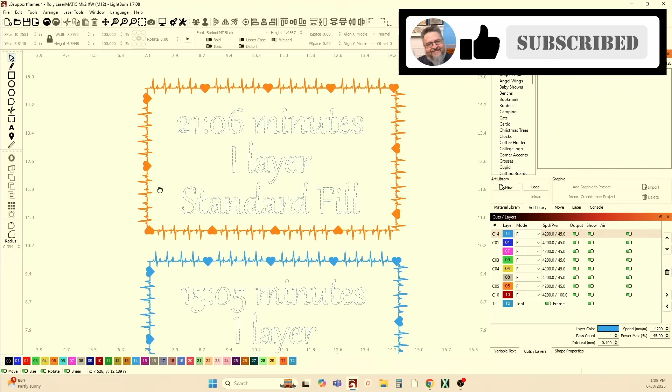Here I've got it on a layer, single layer in a standard fill, and we look at the estimated time here, showing 21 minutes and 6 seconds. Now, you can see I've got the traversal moves turned on, so you can see the red is showing you all of the movement that the gantry is making with the laser. So anywhere you see red with no black is wasted space, wasted energy, wasted time, because the laser's just moving and not doing anything. It was showing 21 minutes and 6 seconds.

So he went with flood fill. Golly, I labeled that wrong, and I labeled that wrong when I sent it to Lightburn, because I've actually sent this to Lightburn asking for some feedback and some advice on how Lightburn's reasoning works, how does it rationale, what to do when it does what it does. And I labeled that as offset fill, and it's flood fill. See, I screw up all the time. So let me fix that real quick, so people don't come in the middle of it and say, wait a minute, that's not offset fill, it's flood fill. So this is flood fill.

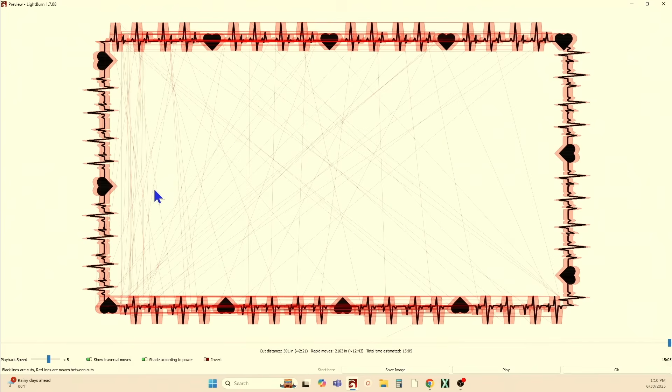So flood fill goes from 21 minutes, you see, to 15 minutes. So he saved 6 minutes on this engrave time, but you can see all of the rapid movements or jumping around and jockeying back and forth that the laser's doing. In fact, let's scroll this back and let you see it here. This is flood fill.

Flood fill, that's what I would expect flood fill to do. Just kind of come up and do all of that axis and then do all of that, but it doesn't. It engraves a little bit there, and then it jumps down to the bottom, and it jumps over it there, and then does all that axis. That's good. And then it starts jumping around, jumping around, jumping around, jumping around.

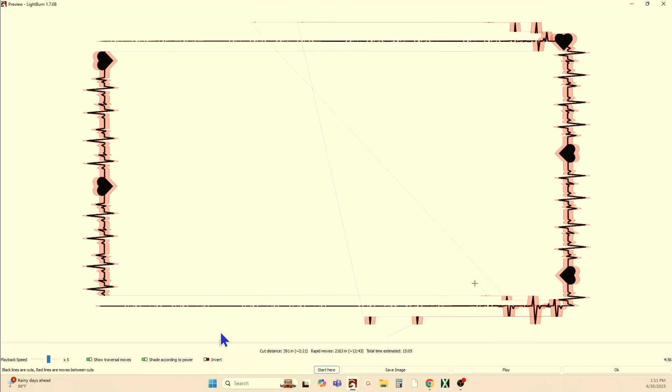And I don't understand that. It doesn't do it based on the origin, it doesn't do it on closest engraving. I don't understand why it does that. But regardless, it still saved 6 minutes doing that. But I'm like, okay, that's still all those movements from back and forth and around everywhere, and I'm cutting down on my cut time here.

That's wasted time. So I said, gotta be a better way. Let me show you the way I think flood fill should work, not offset fill. There, that's better. That's a faster cut time.

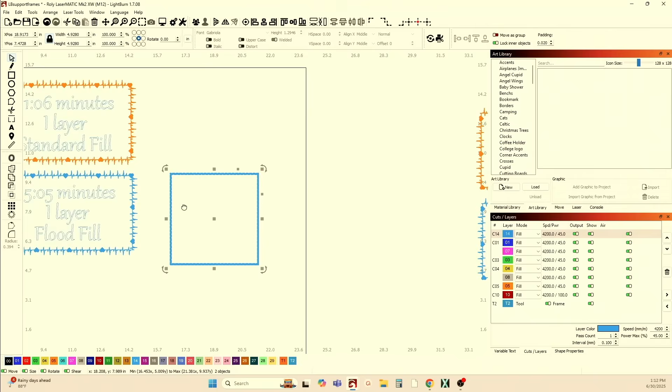So here is... oh, I didn't mean to do that. I wanted to grab the whole thing. Here's just a square that I've got on the same layer as the flood fill.

And when we look at this, you see there's no jumping around. This is the way I would anticipate flood fill to work. It's going to do everything. This is the most efficient movement of the laser. It does that entire axis until it gets to the very end.

Now it starts crawling up one of the side pieces. It'll do all of that. And once it reaches the top, where that top one starts, it'll start going all the way across the top. Now it does all that top until it's done, and then jumps over and does the other side. Now that completes the entire flood fill with no wasted movement across the interior of the frame.

And that's how I would anticipate flood fill should work, but it doesn't. Whenever you've got some designs going on, it's causing the laser to jump around, especially on the x-axis. It doesn't do it so much on the y, but anything on the x, it gets discombobulated and does all kinds of crazy stuff, all the while still saving you time.

Okay, while I'm recording this, I've been going back and forth with Lightburn's support, trying to get a better understanding about why this does what it does when it does what it does.

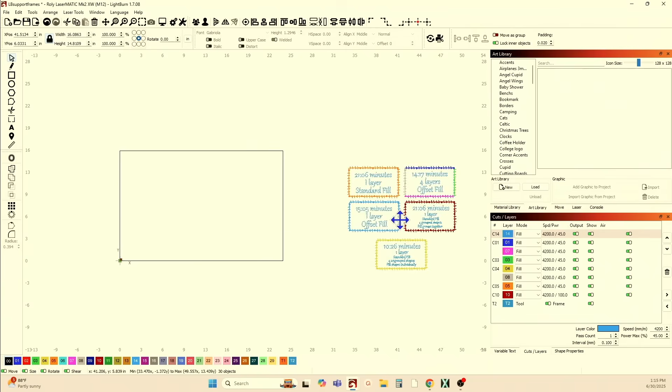So let's grab all of this, and we're going to get rid of that for a second, and we're going to grab all of this and bring it in over here. And what you can see here is I have configured this frame in 5 different configurations. Here's the standard one we just looked at. Here is the standard with a flood fill.

I should have fixed that. I got that wrong in both places there, so let me fix that. Flood fill.

Flood fill. Okay. There, that's standard, that's standard. Okay, now. Very good.

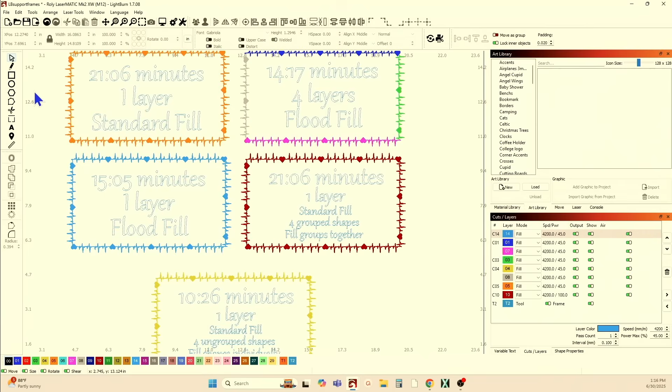So 21 minutes, 15 minutes. I got it down to 14 minutes. That one went back up to 21, so essentially that's the same as the original. But then I got it down to 10 minutes and 21 or 26 seconds. So I've cut the engrave time in half, from 21 minutes to 10 minutes.

Now we're talking about some serious time saving. If you were engraving 6 of these in a day, you've just saved an hour, right? And that's just on the frame.

So how did I do this, and what's the difference, and how did I come about it? Well, I come about it by just testing and testing and testing some more. And you cannot test enough when it comes to your laser designs and work. The more you test, the more you're going to begin to understand how the program works, how your lasers work. So don't be afraid to try new things. Undo is always your best friend.

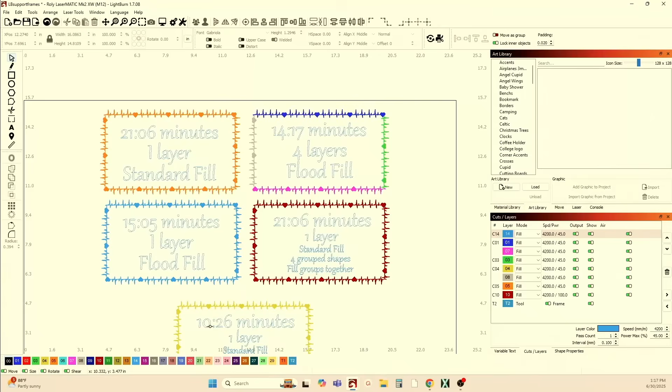So what I did initially to cut it from 15 to 14 is I took the laser and took the frame and cut it up into 4 quadrants, each on its own axis, north, south, east, and west, and put all those on their own separate layer. They all have the exact same speed and power settings, so that doesn't deviate any.

That one's different power, but it's the same speed, 4200. So I'm keeping everything as equivalent as possible. Here I'm still using the flood fill, but 4 layers.

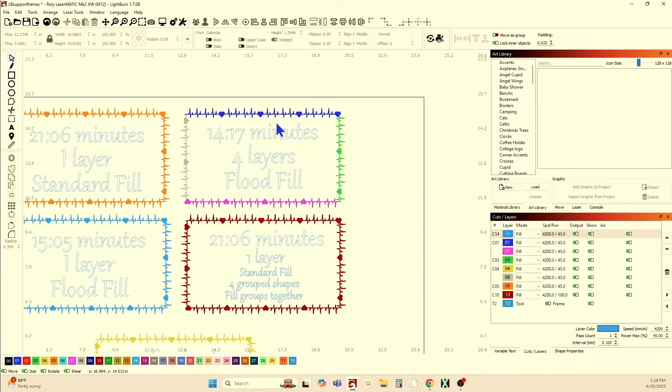So let's look at this one down here again. Look at the preview. You see you got a lot of extra traversal moves across there. Here, if we take this one and look at it in preview...

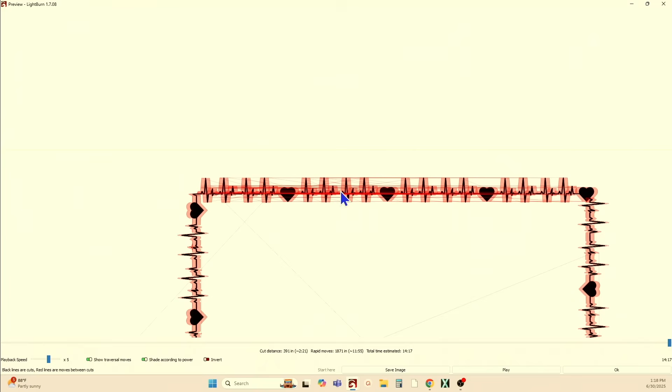you don't have all the extra traversal moves across the middle of the body, but there's still a lot of unnecessary movement up here on the actual x-axis and down here as well. You don't see it on the y. The y gives you exactly what you expect, but on the x-axis in flood fill, it jumps around all over the place. So if we roll this back, there you can see what I'm talking about.

It's going to begin to fill, and it just starts jumping around on the x-axis in flood fill. And those are the pieces of the puzzle I was talking about that are going to need to line up every single time that laser jumps around.

We've saved some more time, saved another minute from 15 to 14. But when I looked at this, this is the same 4 individual pieces, but I put them all on the same layer. So this is a standard fill, 4 grouped shapes, fill groups together is the option I have in the fill setting, and I'll show you that.

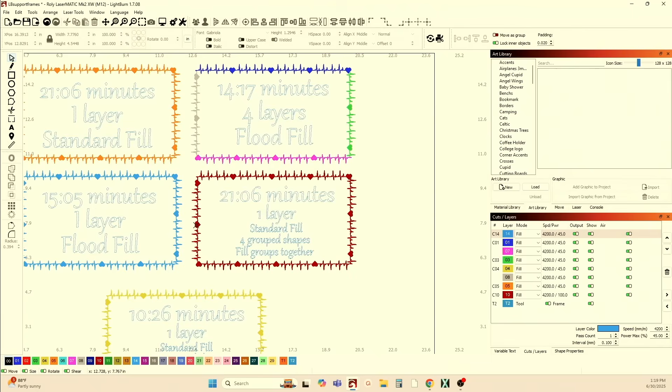But when I did that, if I look over here and click on this one, let's see, it's grouped. And if I go to preview, 2105, changed a second, but it's the same as up here. All right, I've got all that wasted energy and wasted time.

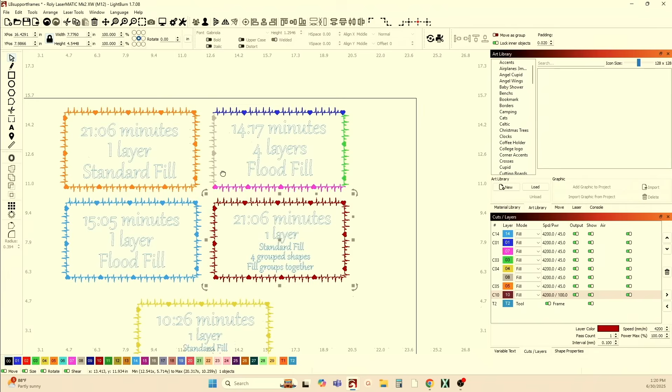This one is the same thing again. So these are all the same configuration. This is west, east, north, and south. And if I come down here, I've got the same thing. There's west, there's east, there's north, and there's south. So this one is exactly the same as this up here.

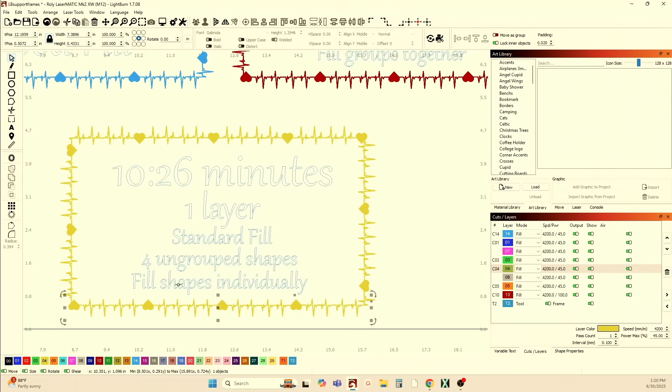But what I did differently is instead of using flood fill, I went back to the standard fill and I left them ungrouped and fill shapes individually. So this is the difference between 10 minutes and 26 seconds and 21 minutes.

These are 4 grouped shapes and fill groups together. This is 4 ungrouped shapes and fill shapes individually. And then we'll just look at this preview and then I'll show you those settings.

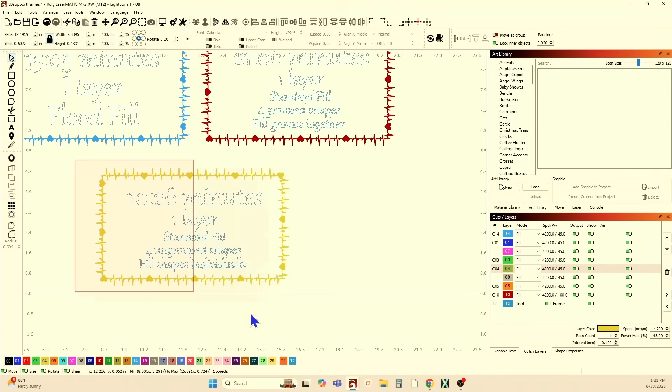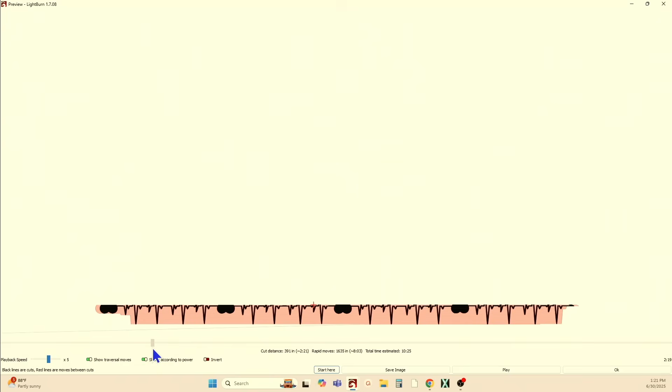Preview. Now this is how I would expect flood fill to work, where it's going to fill each axis top to bottom and then go grab the next axis. That's how I would anticipate flood fill to work correctly and the most efficiently. Because you see there I had one traversal move across the center and that's it. And everything got engraved without all the hopscotch and jumping around.

Now the difference is in the grouping and in the settings. So if I go to layer 10, that's the 4 individual shapes, four grouped shapes and fill groups together.

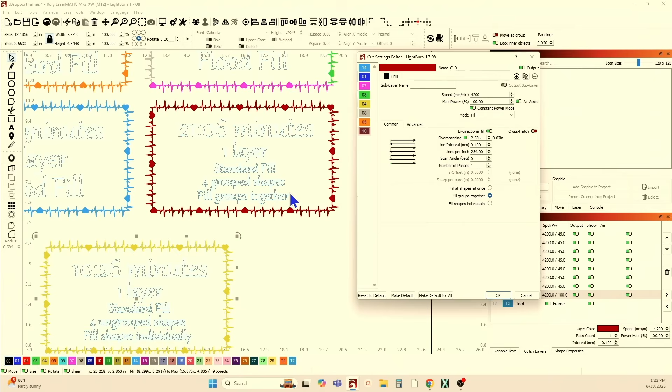So all 4 shapes are grouped and set to fill groups together. That's back to the original time as if it would have been all one grouping. It doesn't matter that they're individual shapes, because once you group them and fill groups together, it becomes one group. You're no longer at 4 individual pieces.

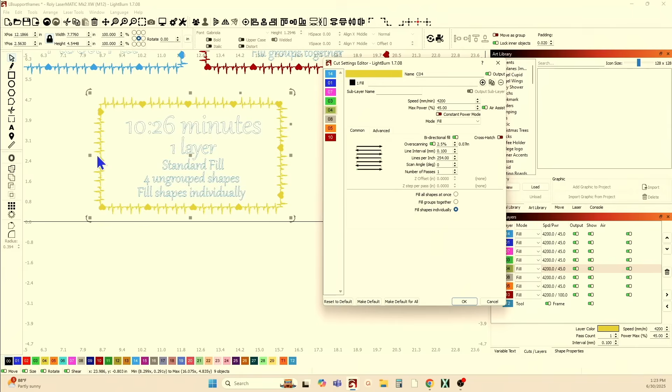Down here, we've got 4 ungrouped shapes, so there are 4 individual pieces, and we've got fill shapes individually turned on instead of fill groups together. With them being individual pieces, and telling the laser to fill each piece individually, it's going to fill that shape, then go to the next one, fill that shape, move to the next, and so forth.

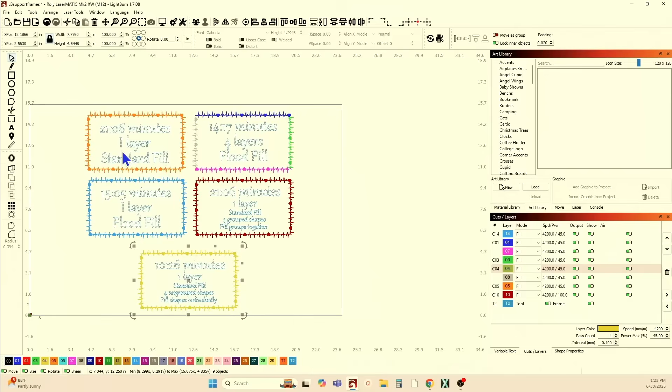So let's grab all of this and pull it over here, and get that new one that I redesigned, not flames, frames. There we go. So here is one I reworked the design, the layout. I centered up the hearts and fixed, didn't fix, I did not fix anything. I hobofied this artwork. This was his artwork, and I hobofied it.

I like symmetry. I see it, and symmetry is accepted as, the more symmetrical an item is, and or a person, the more pleasant it is to the eye. I've seen studies where they've taken faces of individuals, even someone who isn't a classic beauty. The more symmetrical their face is, the more pleasing they are to the eye. You can take someone who has got a very attractive right side of the face and a very attractive left side, and if they're really asymmetrical, the more asymmetry that's there, the less attractive they appear to be.

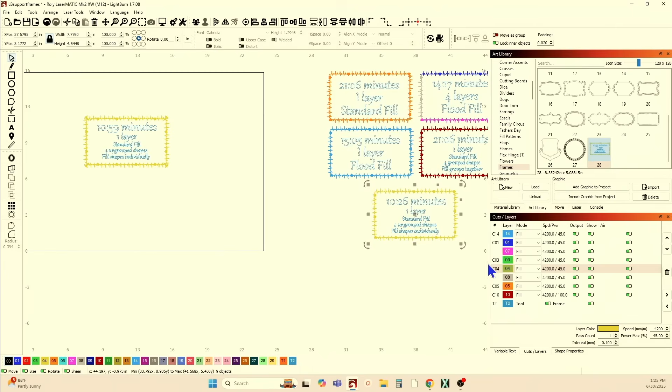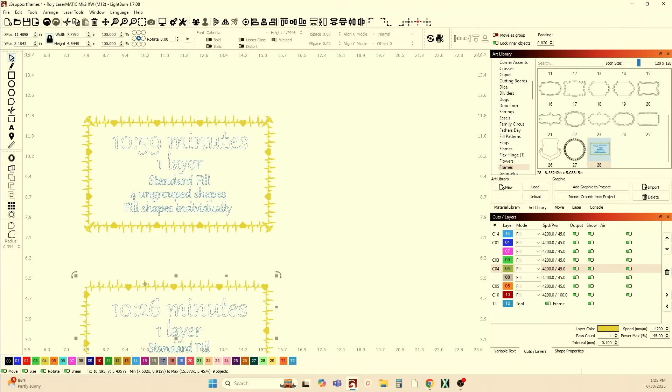Same thing with our artwork. The more symmetry we can build into it, the more pleasing it is to the eye. So I did not improve it, I hobo-fied it, and this is what I did. I just centered things up. In fact, let me bring one over here so you can see them side by side. I went in and changed the position of the hearts and added some corner pieces for the medical field. So this is just a hobo-fied version, and because of what I did, I ended up adding a little extra time to it because I got more engraving going on.

But this is still 4 ungrouped shapes with fill shapes individually. And when we look at this, it's 11 minutes, with only that one wasted traversal move.

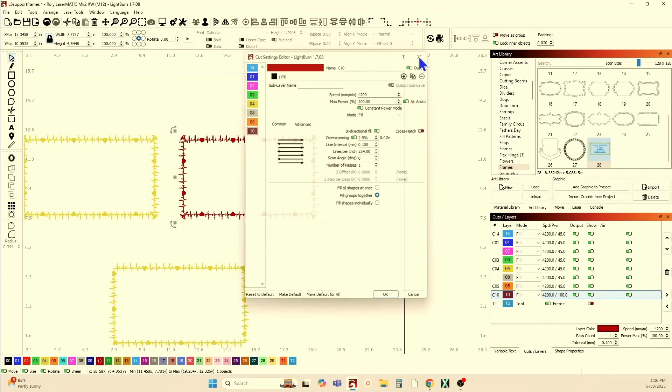But if I take that, let's duplicate it and bring it over here. Now I'm going to turn off the toolpath and select these 4 individual shapes, because if you see down here, it tells you how many objects you've got, 4 objects. And if I just simply group them and put that on the layer where it's set to fill groups together, now look at the preview: 21 minutes again instead of the 11 minutes.

So I've learned that flood fill works great as long as there is uniformity to the frame area. It doesn't have to be rectangular, as long as it's a constant path without a lot of artwork, ropes and chains, and heartbeats and all that. It seems to affect flood fill on the x-axis. The y-axis does what it's supposed to do, or what I anticipate it to do.

All of that aside, if you take your frames and divide them up into 4 sections, north, south, east, and west, leave them all on the same layer, leave them all ungrouped, and then set fill to fill shapes individually, it's going to move in a way that I anticipate flood fill should work. You don't have to worry about the precision of your machine. If you're not using the Roly lasers, your laser may be, it works great, but maybe it's just not as precise. It's okay.

If you do it this way, your laser is going to be moving in a continuous motion. And if anything, maybe your square is just a little skewed if your belts aren't right. But you don't have to worry about things lining up because you're moving in a constant line. It's going to be lined up.

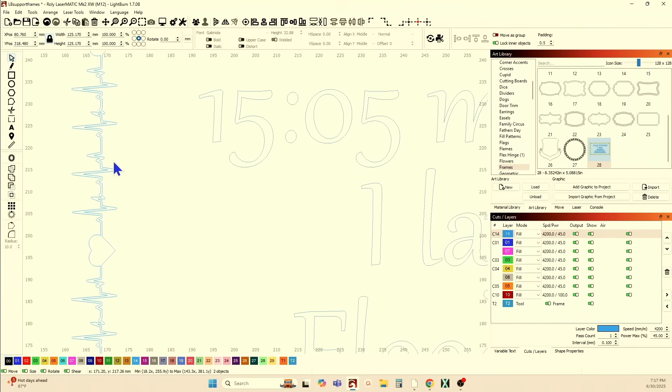So this is the original shape, and right now I've got it in wireframe mode. So if I put it in fill mode, you can see it's filled. Put it back in wireframe mode, and if I select just this frame, it is in flood fill, and as I said, it's 15 minutes. And I look at the preview, just to confirm everything.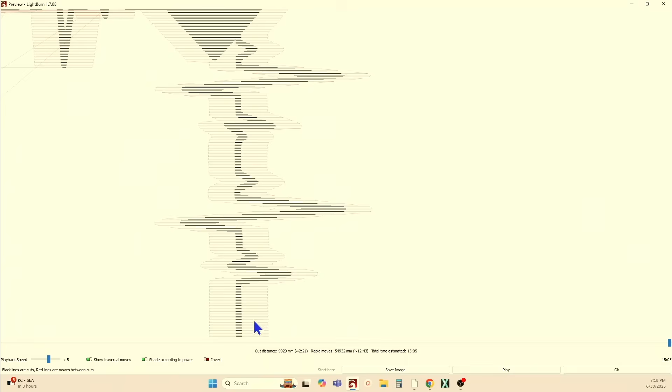It's 15 minutes and 5 seconds. And I want you to look here. When it was moving up the y-axis of the frame, everything's being engraved on a 0 degree angle, left to right. But as we moved up the y-axis of the frame, on the left side, on the right side, you see it's just a continuous engraving. It's not doing anything irregular. It's not jumping around and acting a fool.

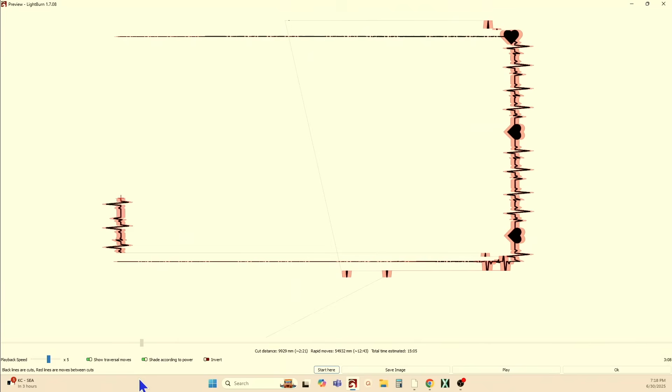But once we got to the horizontal part of the frame, or the x-axis of the frame, everything's all chopped up and done in individual pieces, little jigsaw pieces, on the top and the bottom. If I scroll that back, once again, you see what I'm talking about. As it goes up that column there, just nice and steady, regular engraving. Then once it goes back to the top, bottom, top, bottom, top, bottom, bottom, bottom, top, top, bottom, bottom, top, it's jumping everywhere. And that's with a 0 degree scan angle.

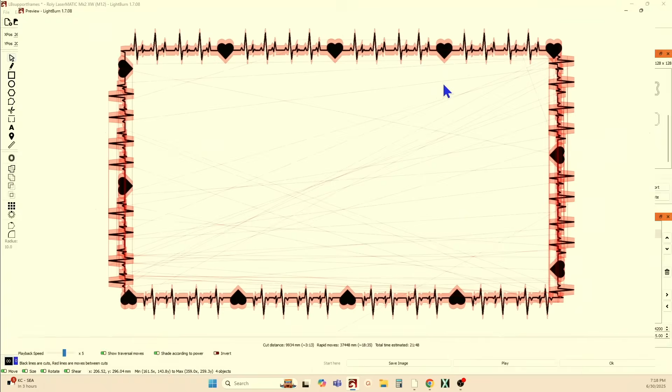So let's see what happens when we go in here and change our scan angle to 90 degrees. Preview. It inverts the results. Now everything across the top and across the bottom is being engraved in one fell swoop, but the sides are being all chopped up.

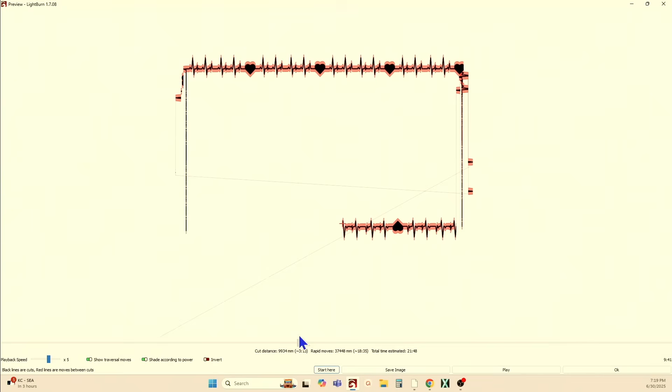So there you can see, all the way across there, no problem. Then, well, it did chop that part of the top, and I didn't see that, but oh no, that's right, duh, it's the top and bottom that get all the way across there, no problem. It starts a little bit on the top and stops, goes the other side, starts top, then it jumps down to the bottom and does all the way across the bottom. And then once it's done that, it'll go back and forth, right, left, right, left, right, left, until it gets finished.

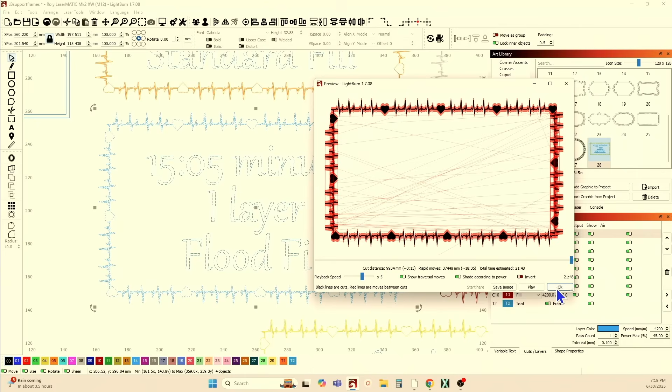Let's look at the time there. It changed to 21 minutes and 48 seconds, and it's still in flood fill. All it did was change the scan angle from 0 to 90, and it jumped 6 minutes by changing the scan angle. The reason for that is now it's working on a 90 degree scan angle, so it's moving that gantry and the whole laser head, everything. It's moving a whole lot more mass, and even though we're showing 4200 millimeters a minute, same speed, it's taking longer because it's moving more stuff.

Those are estimate times, and it's taking 6 minutes longer on a 90 degree scan angle.

They never really understood, or initially they didn't understand, I was looking for the fastest fill engraving. Initially, they said, here, we can do it in 3 minutes. I said, show me how you did that in 3 minutes. And you got it in line mode. Of course you did it in 3 minutes. You didn't engrave anything, all you did was put a line on there. That's not what I'm looking for. I'm looking for the fastest fill engraving.

And they said, well, that's how flood fill works. They said on complex shapes, LightBurn will divide those shapes up into pieces to make it most efficient engraving. Well, that's not the most efficient engraving, and it's not 100% accurate because depending on the scan angle, it determined what was being chopped up. So I think there's actually a small little flaw in the math somewhere on that flood fill.